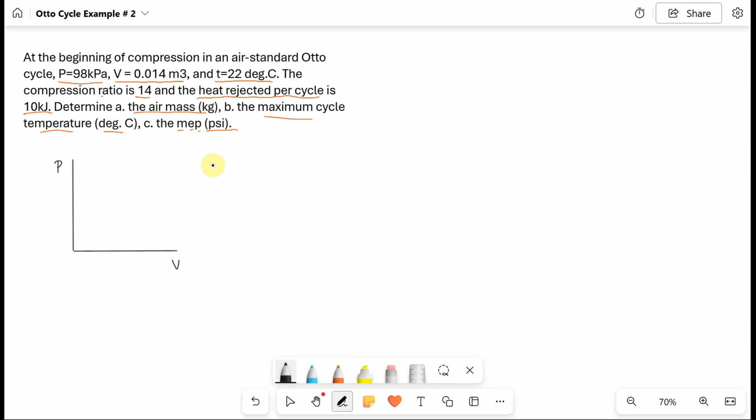Okay, so again, air standard Otto cycle or gasoline cycle: process 1 to 2 is isentropic compression. Compression means the volume decreases from point 1 to point 2. And then heat addition is a constant volume process.

Constant volume means volume 2 equals volume 3. And then 3 to 4 is isentropic expansion. Expansion means the volume increases from point 3, which is small, then it expands at point 4.

And process 4 to 1 is constant volume heat rejection. So in the PV diagram, we already see that it should be straight as much as possible. Point 1, point 2, point 3, point 4, where V1 is equal to V4. And from 2 to 3, this is constant volume, that is V2 is equal to V3.

And again, this is 1 to 2 constant entropy, 2 to 3 constant volume, 3 to 4 constant entropy, 4 to 1 constant volume. Okay, for the equivalent TS diagram, 1 to 2 is constant entropy. So at point 1, entropy 1 equals entropy 2, so it should be a straight line there, since the entropy is equal.

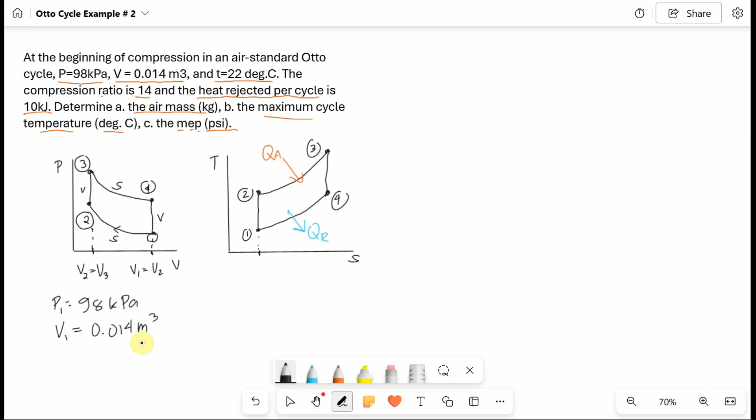And then we have volume, volume 1 is 0.014 meter cube. So that's the given volume, not specific volume.

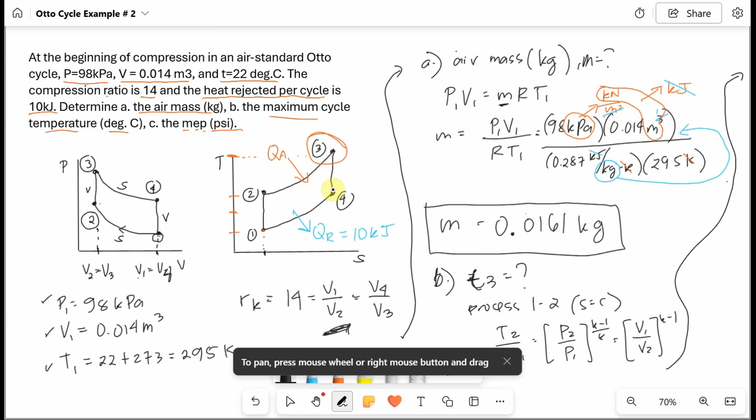Let's go to the one with given values. So heat rejected is given for process 4 to 1, constant volume heat rejected. So the formula for heat rejected is M, constant volume CV, delta T.

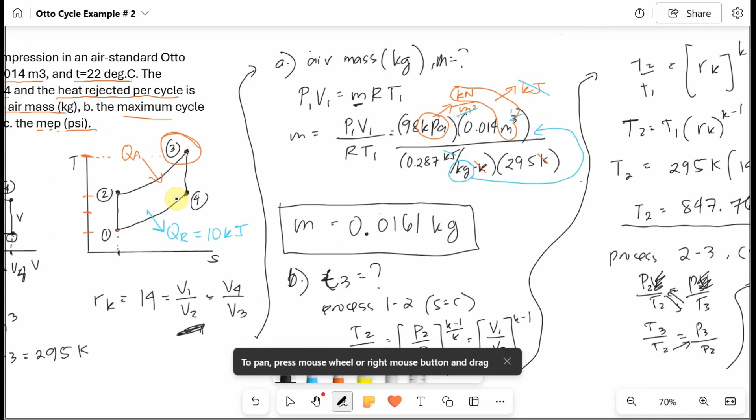Which is higher in temperature, T4 or T1? T4. So it's T4 minus T1. Okay, and again, I used Kelvin here, to keep everything consistent in Kelvin. Our QR is 10 kilojoules.

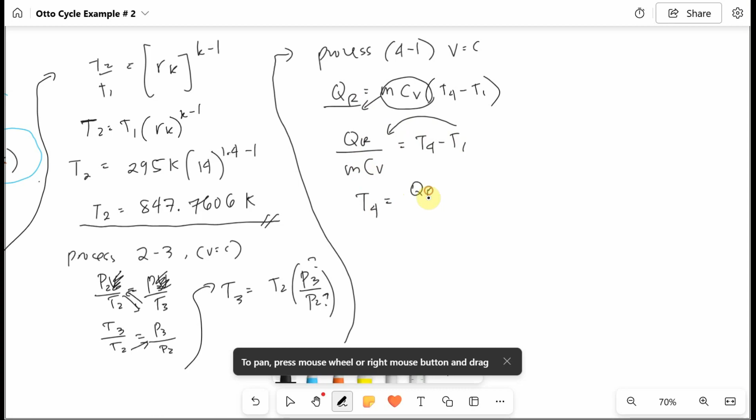Given. So let's divide both sides by this whole term, place it under, then cross multiply. QR over MCV is equal to T4 minus T1. Then transpose T1, then mirror the equation: T4 is equal to QR over mass times CV plus T1.

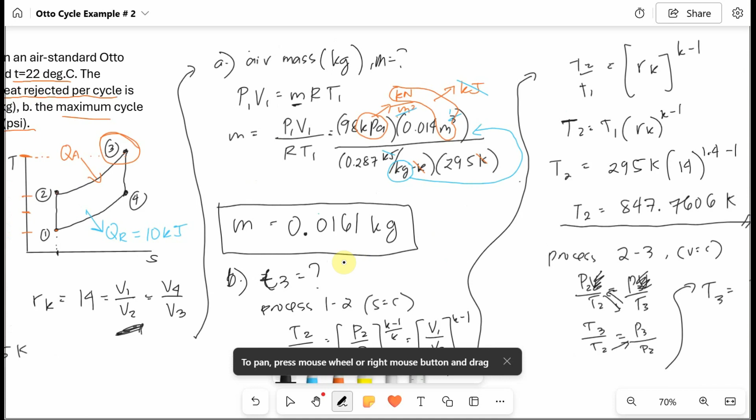So T4 is QR. What's our QR? 10 kilojoules, over mass. Our mass is 0.0161 — if you stored that, that's fine too. Stored mass is 0.0161 kilogram, and CV is 0.7186 kilojoule per kilogram Kelvin, plus T1 in Kelvin, that is 295. So that's plus 295 Kelvin.

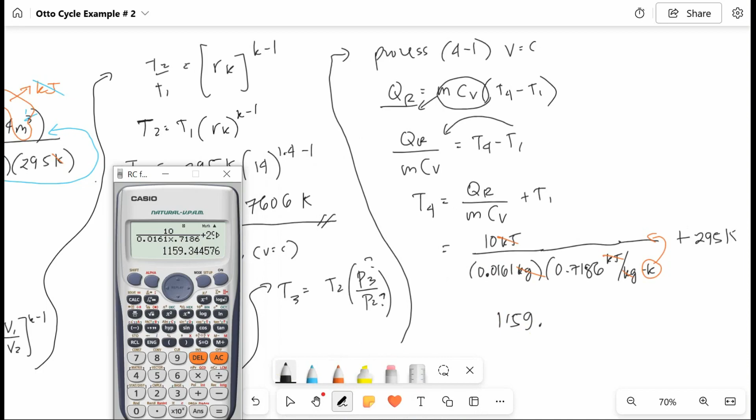0.0161 times 0.7186, plus 295, equals... so 1159.3446 Kelvin. Okay.

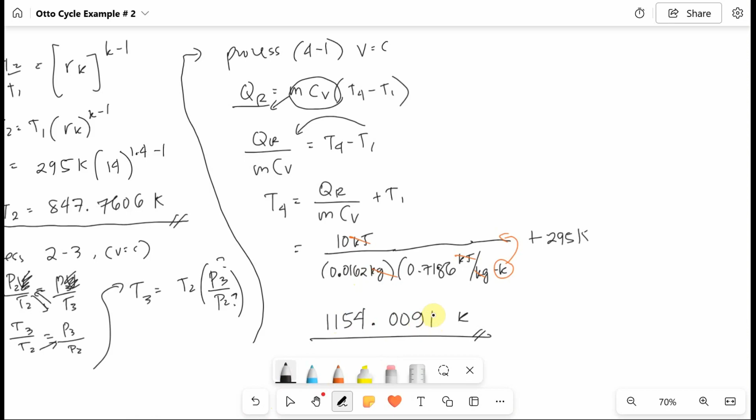0091 Kelvin. So that is T4. Okay, so now we have T4. We need T3. In process 2 to 3, we can't get T3 from there.

Because we don't have that here. So let's go to process 3 to 4, constant entropy. Okay, so process 3 to 4, constant entropy. So, T4 over T3 is equal to the volume ratio, V3 over V4 raised to K minus 1. Since we also don't have pressure 3 and pressure 4 — not all pressure points are asked for. Okay, so V3 over V4, let's relate that to RK.

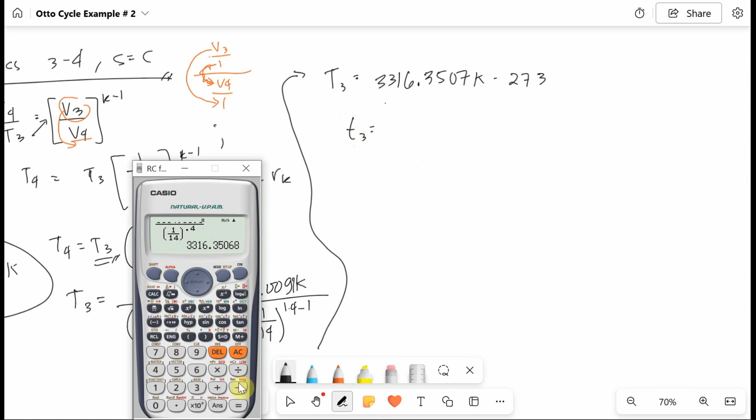But what we're looking for is in Celsius. Maximum temperature cycle in degrees Celsius. So what we'll do is minus 273 from our answer. That gives us 3043.3507 degrees Celsius.

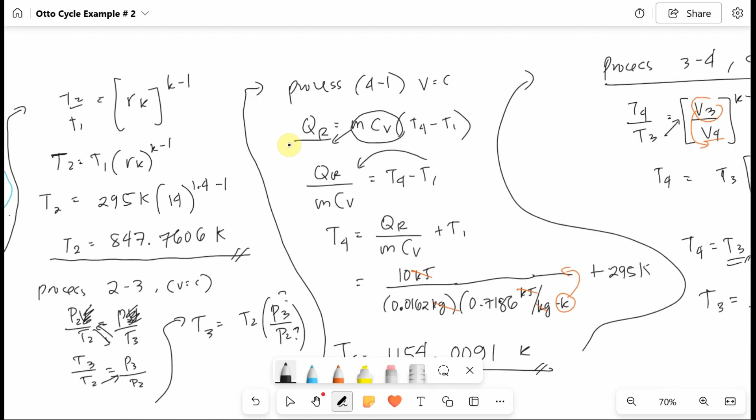Okay, so we have the mass and we now have the maximum temperature T3. Next, what else are we looking for? The mean effective pressure.

So letter C, the mean effective pressure in PSI. Mean effective pressure is work net over VD. Our work net is QA minus QR. Our VD, volume displacement, is what the piston travels.

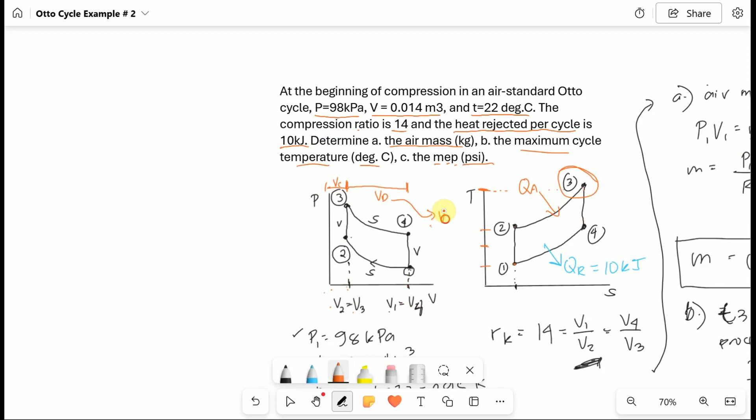VD is different from VC, the clearance volume. VD is equal to V4 minus V2, or V1 minus V2. VD is volume displacement, meaning the volume swept by the piston in the cylinder.

V1 minus V2. So we have QR, we have V1, but we don't have QA, heat added. Where is heat added? In process 2 to 3. So heat added at constant volume is m times CV times delta T, which is T3 minus T2.

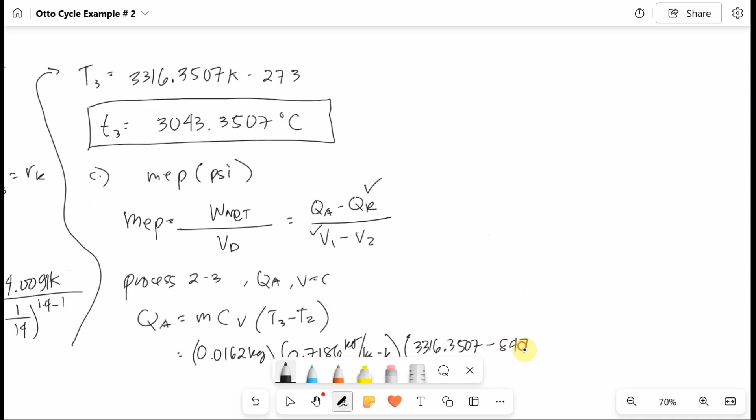So for heat added, where's our mass? 0.0162 kilogram times CP. But since it's constant volume, it should be CV, 0.7186 kilojoule per kilogram Kelvin, times T3 in Kelvin, since we converted everything to Kelvin, which is 3316.3507 minus T2 in Kelvin, which is 847.7606.

When you subtract them, the Kelvin units cancel. So our heat added is 0.0162 times 0.7186 times 3316.3507 minus 847.7606, which equals 28.7376 kilojoules. That is the heat added. Heat added is always higher than heat rejected, and our heat rejected is 10 kilojoules.

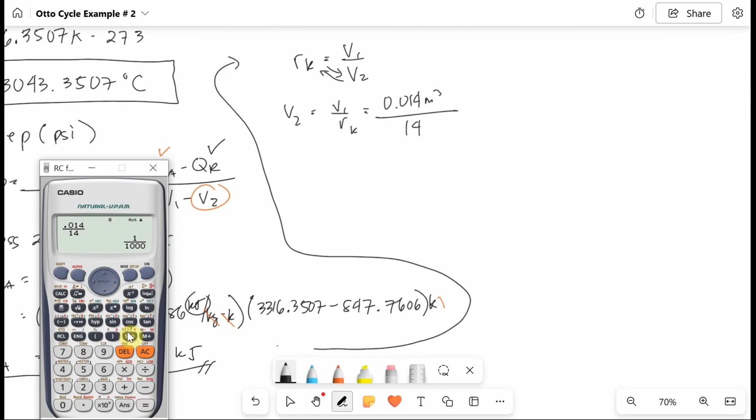So we have heat added now. Check V2 - we don't have V2 yet. But we have V1 and RK. So we can use RK equals V1 over V2. Therefore V2 equals V1 over RK. V1 is given as 0.014 meter cube, over RK which is 14. So V2 is 0.014 divided by 14, which equals 0.001 meter cube.

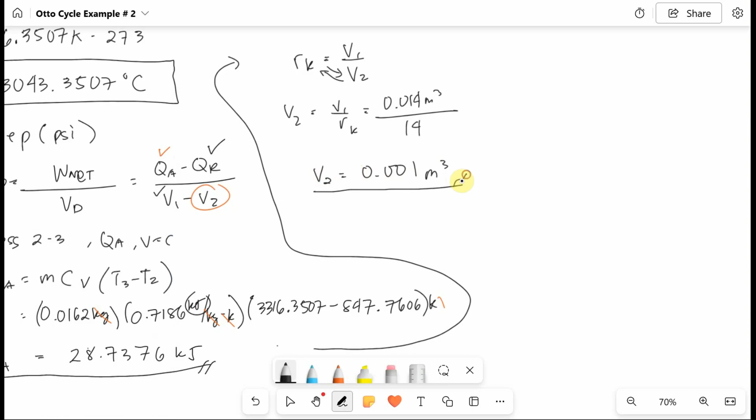So of course V2 is smaller than V1 since you compressed it. Now we have all the given values for MEP. So we can solve MEP, which is QA minus QR over V1 minus V2. Heat added 28.7376 minus heat rejected 10, both in kilojoules, all over V1 which is 0.014 minus 0.001, both in meter cube.

So the result should be in units of pressure. Kilojoules is kilonewton meter, so one meter cancels and becomes squared, giving kilonewton per meter squared, which is the unit of pressure, kilopascal. So 28.7376 minus 10, all over 0.014 minus 0.001, equals 1441.3538 kilonewton per meter squared or kilopascal.

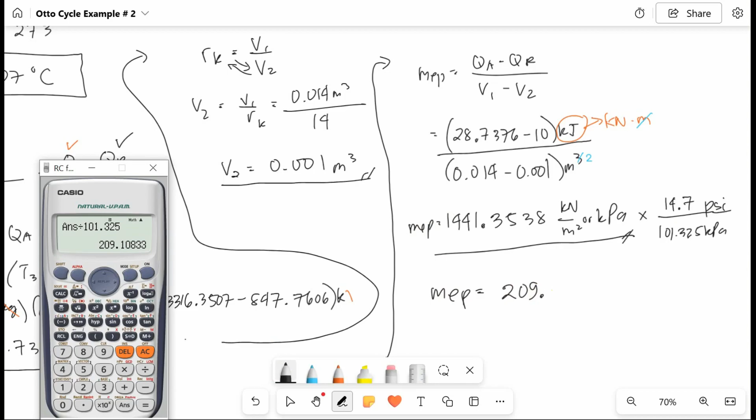But the required unit is PSI. So let's convert kilopascal into PSI. 101.325 kilopascal equals 14.7 PSI. So MEP in PSI equals 1441.3538 times 14.7 divided by 101.325, which equals 209.1083. I only require up to 4 decimal places, but it depends on your instructor or professor how many decimals they require.